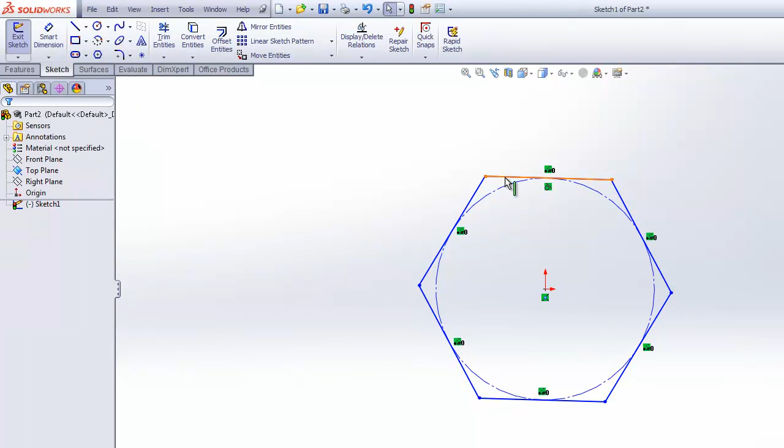First, do an extrude boss base in the top plane and create the hex shape for my nut. Put in horizontal for that top piece, and dimension from flat to flat: 1.125. Then extrude that. It's 0.525 in height.

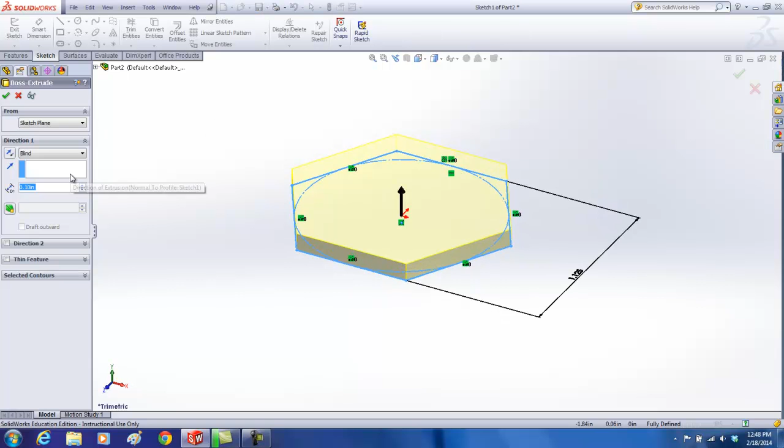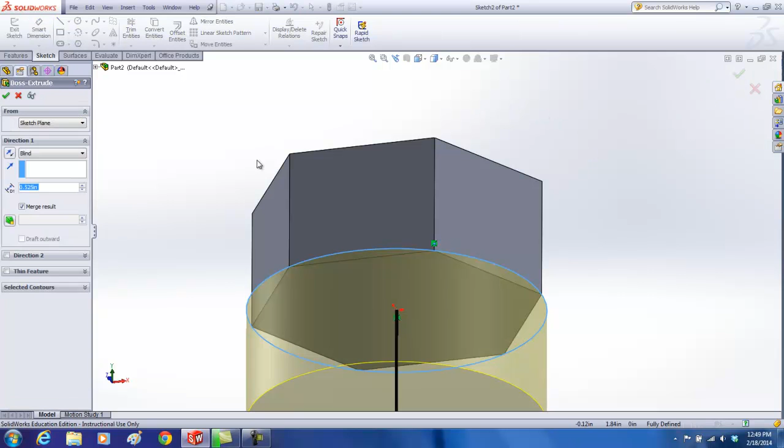Now I'm going to create two different pieces of geometry and then join them. I'll create another extrude boss base off the bottom face and a circle that goes out to the outer corner, flip it the other way, again 0.525, but I'm not going to merge the two. I'll turn off merge result, so they're two different pieces of geometry - two different solid bodies, the hex and the cylinder.

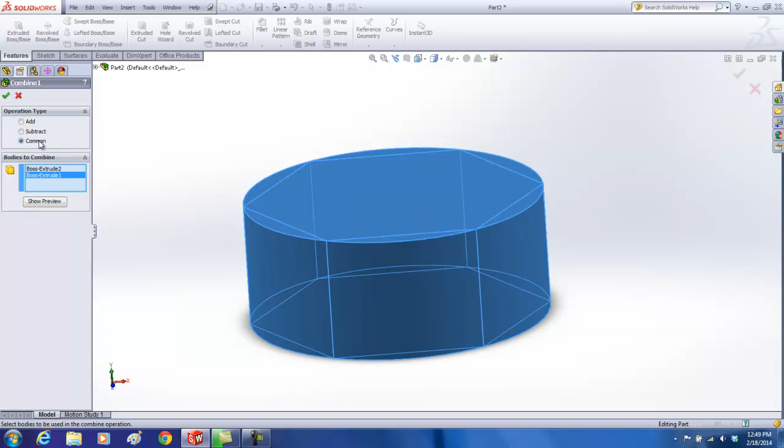Then we can go to insert, feature, combine, and combine these two in a common intersection. Oh wait, before we do that, let's put in a fillet - a fillet on the top edge and bottom edge at 0.1 on the cylinder.

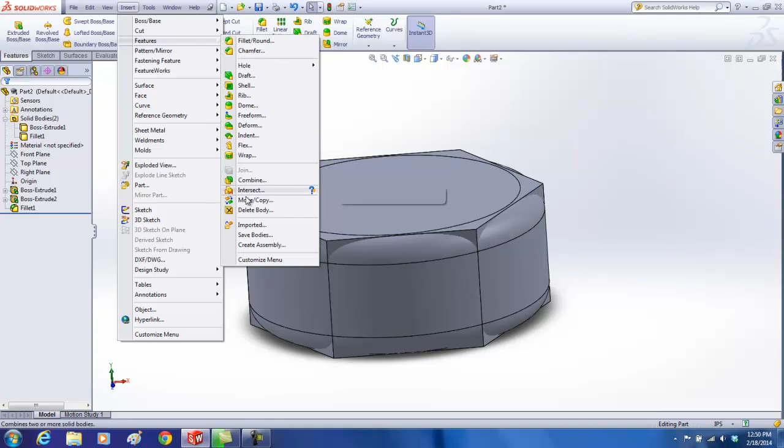Then we use insert, features, combine, and combine in the common intersection the two different solid bodies, and end up with my nut.

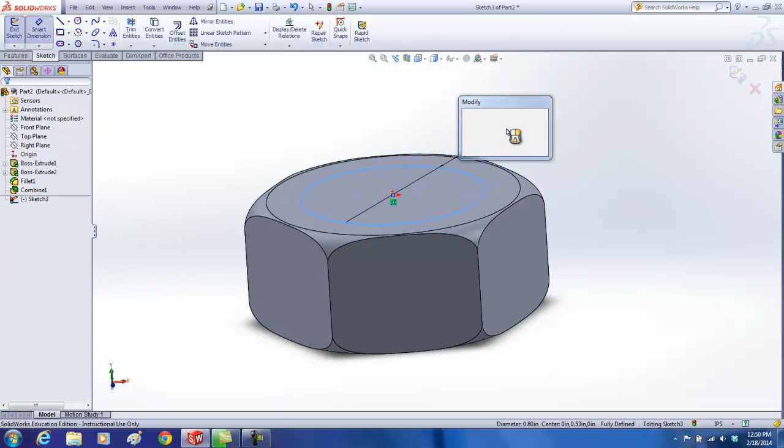I can go ahead and extrude cut a hole in here. Select the center point and dimension it - the inside hole is 0.65, and that's the minor diameter that's going to get cut all the way through.

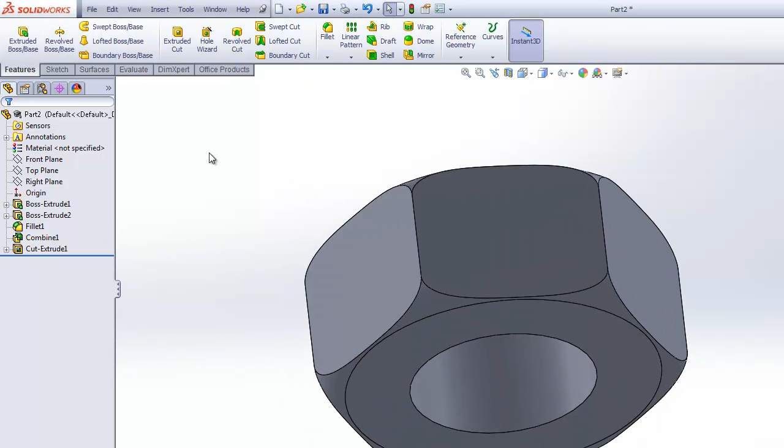Then we can work on doing our threads. That builds the nut, and now the point is creating the internal threads. The internal threads are going to take a helix, but before you can create a helix you need a circle. So we create a sketch on the bottom face, take that outer circle and convert it, and that's the circle needed to create the helix. We get out of that sketch - that's one sketched circle at the bottom to help us generate the helix.

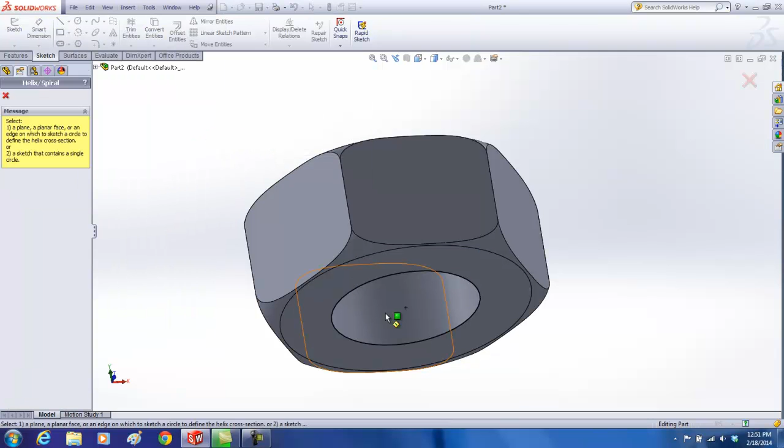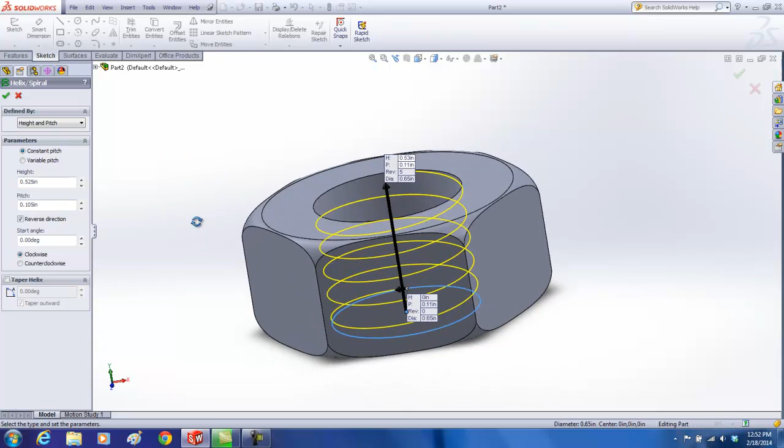Then you go insert, curve, helix. The helix needs a circle to generate. You can reverse the direction. We set it to height and pitch - our height is 0.525 and our pitch, according to the handout, is 0.105. That creates our helix off the circle we created. The start angle, pay attention to that - it's where the helix starts, what angle it starts at, and clockwise or counterclockwise.

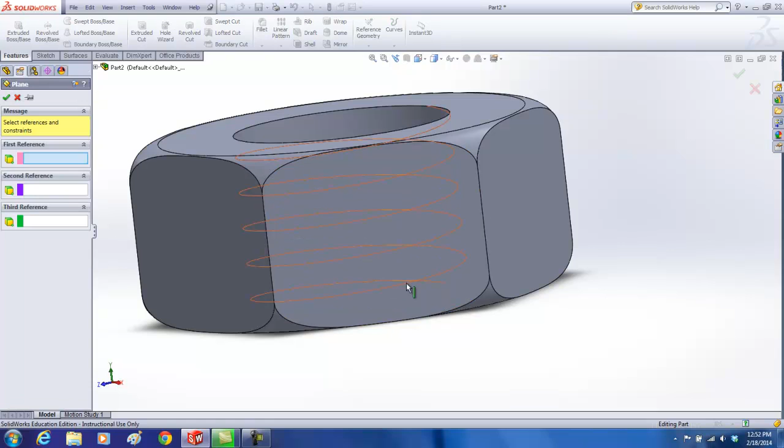So the helix is one part of creating the threads. The other part is to create the profile. In order to create the profile, we need to be perpendicular to that helix. So we go back to features, plane. We select the helix itself and then the endpoint, and that puts a plane right on the endpoint of the helix. That plane is where we'll create our profile.

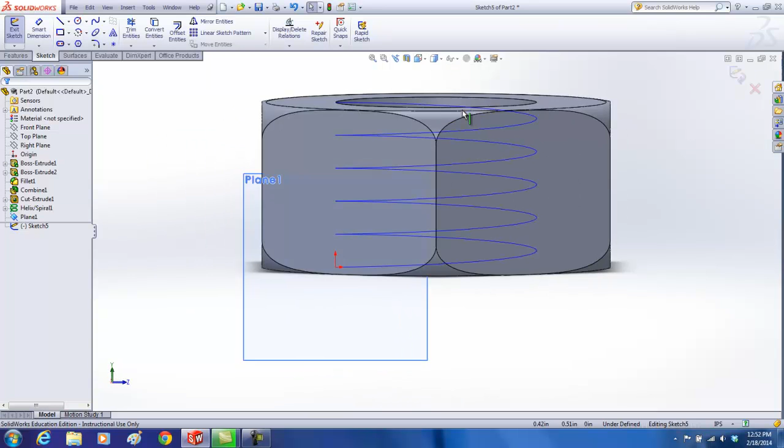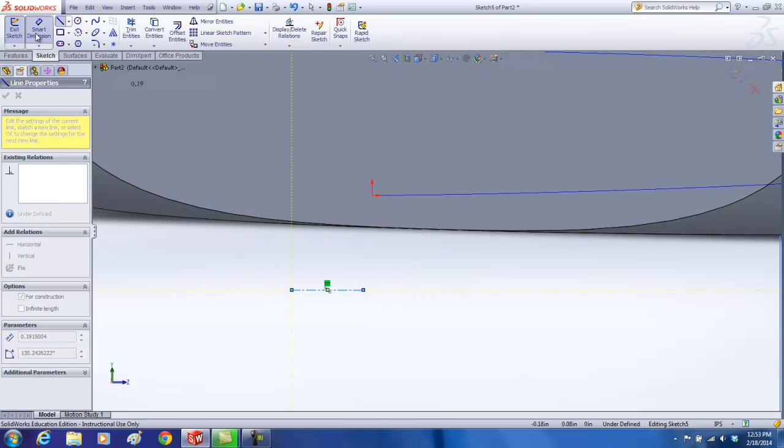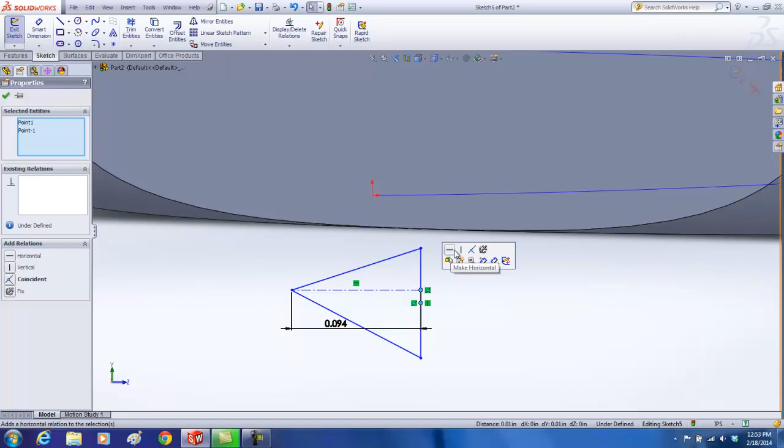So sketch this profile - we'll look straight at it and then create our profile. The profile is something you're going to create away from, so it's going to create 0.094. We're going to create the shape of the profile, connecting the midpoint to the endpoint, dimensioning the angle, and then putting in the fillet at, I think, 0.01.

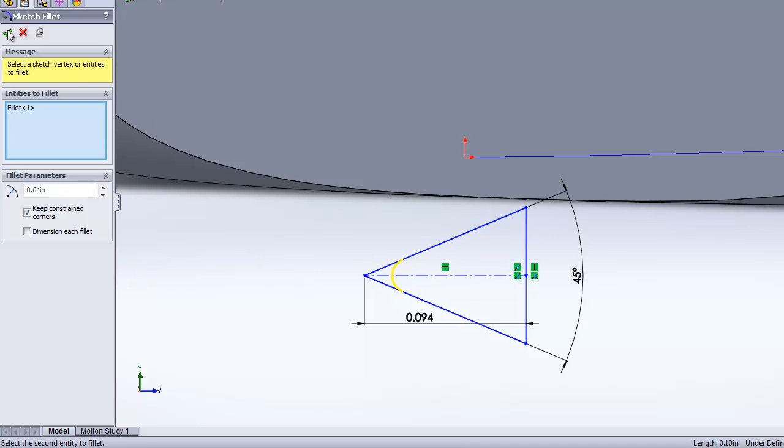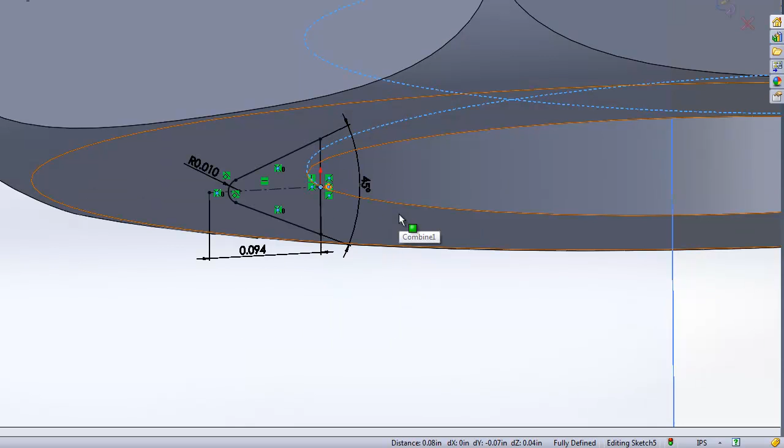Now this is fully constrained, it's just not connected to any existing geometry. What we need to do to connect it to the existing geometry is use what's called a pierce point. You select the helix, control key, select the endpoint you want to connect to it, and then pierce point will show up. Make pierce point and it'll connect that sketch to the endpoint of the path. The pierce point is where the sketch goes through the plane.

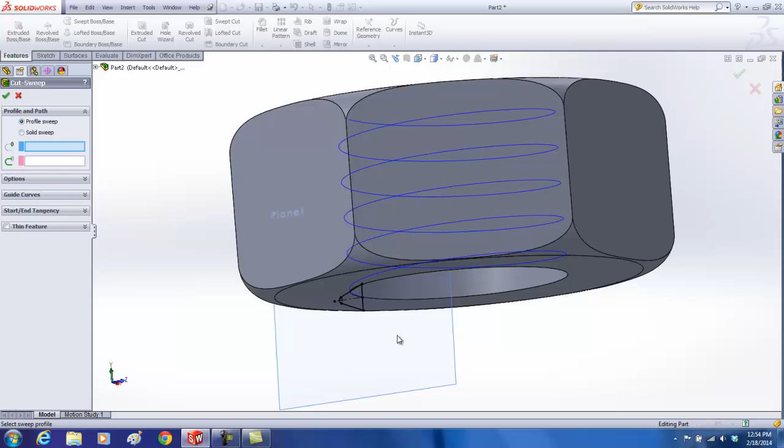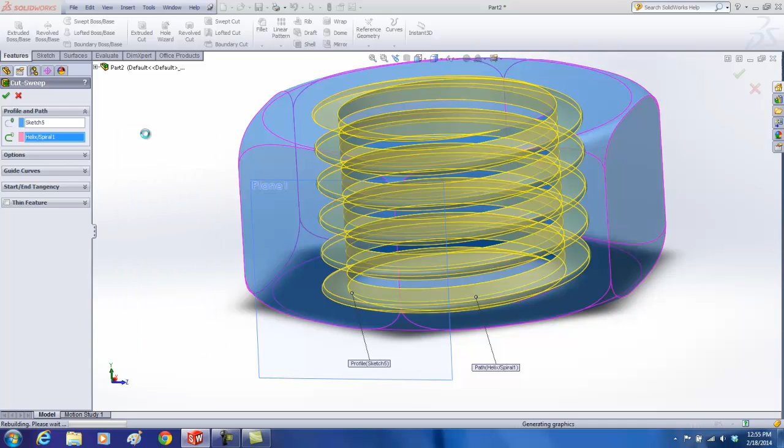So now that I have a path and a profile, I can then do my sweep cut. The profile is the profile we selected, the path is the helix, and it should cut all the way through. Say OK - it may ask which bodies. Say selected bodies, say the original body, and say OK. That should give us our threads through the nut.

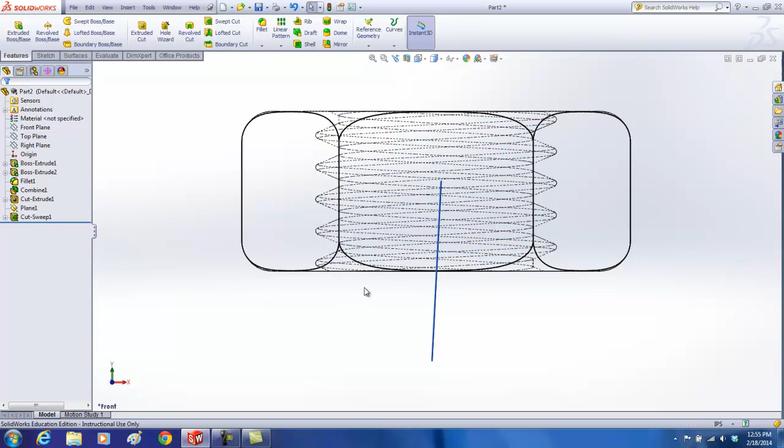I challenge you to see if you can have the threads extend beyond - go above, say, 5 thousandths and down 5 thousandths, so the threads go all the way through. They stop - they don't go all the way through because the helix stops. If you can have the helix go a little farther on each side, then the threads will go through the nut.